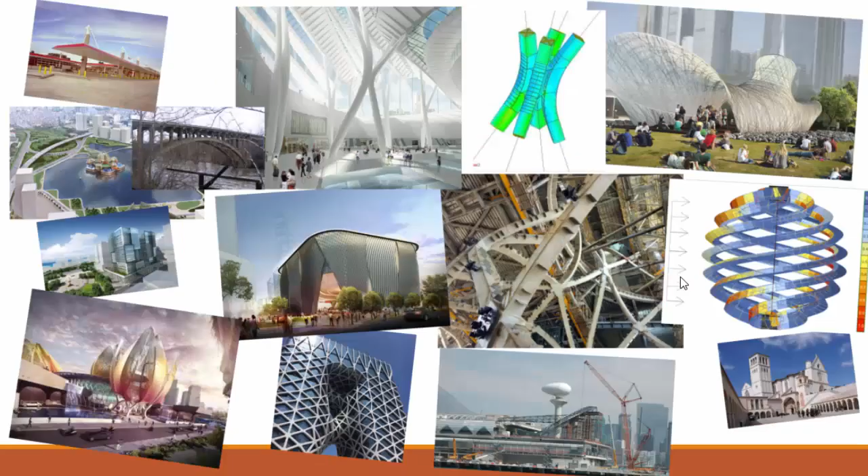You guys already showed me, you guys are doing complex work. You need to be able to speak to the machine just as much as you need to be able to speak to human beings. I'm a firm believer that the only reason I was able to, in this short period of time, work on ridiculously cool stuff like this is because I know how to interact with the machine better than most people in Buro Happold, let alone outside of Buro Happold.

You really need to focus on both. There's not enough in this world anymore to just be awesome at architecture. You need that, that's a given, we expect that. But we need also more people who understand how to interact with the machine. And that doesn't mean going and saying, I know how to use Rhino manually. It just doesn't anymore.

Some of my favorite projects are this one. This was my thesis. This is the Basilica of San Francesco in Assisi, Italy. It's a UNESCO World Heritage Site. In 1997, there was an earthquake that hit the basilica. It had been up for more than 850 years, and this happened. There was some really, really important heritage that was lost, and 4 people died.

Myself and some of the people at MIT, we said, but it's been there for 850 years, why did it actually fall down after 850 years? It's no stranger to things getting hit, this thing getting hit by earthquakes. And it's an absolutely beautiful basilica, by the way, if you have a chance to go.

What we found is in about 1950, there was a beautiful wooden roof, which you can't see in this picture, above all these vaults that collapsed. And they decided, we can't have that anymore, they didn't know what they were doing back in the day, and we're going to replace that with reinforced concrete. So there was definitely a cause and effect that we were able to show: because you destroyed a roof that was 850 years old, which is automatically something you shouldn't be doing in the first place, you actually caused this to happen.

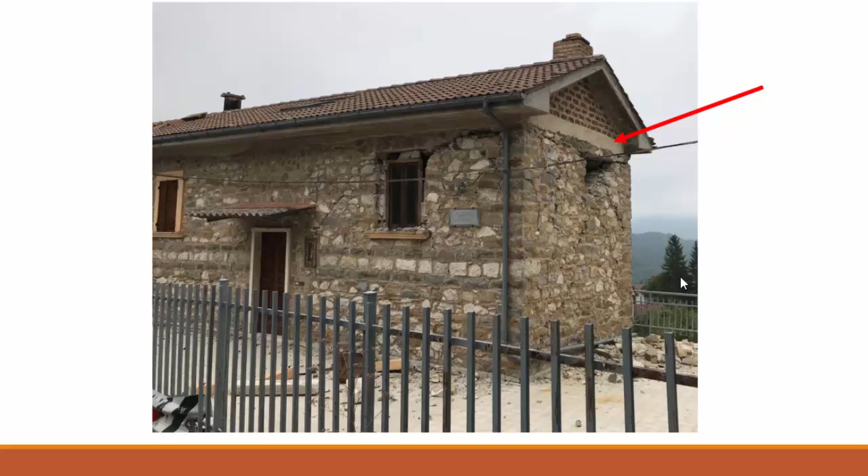That hit particularly home to me. It's really great to be a structural engineer sometimes when this is the house that my grandfather was born in, and the house that I normally would spend my kids' summers in.

When I got the call to say our hometown had been hit by an earthquake, I was already there. I was able to go and tell my family that our house, there was no helping it because right here, they had done the exact same thing to our home. Had we been in here, we probably would have lived, but we probably would have been severely injured.

That's really why, to me, I love being a structural engineer, because you can actually look at stuff like this and understand, nope, do not try and tell me you can fix that without taking the roof out. It's unfortunate, but no one died. And we can actually control how no one will die in the future when the earthquake eventually comes again.

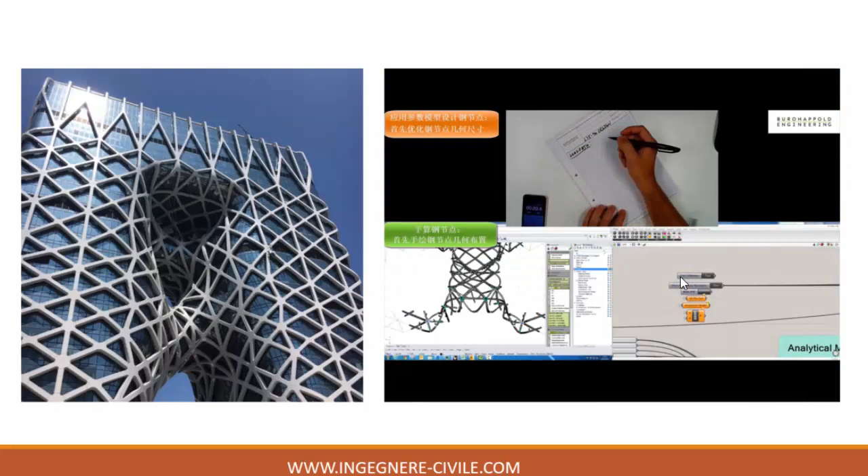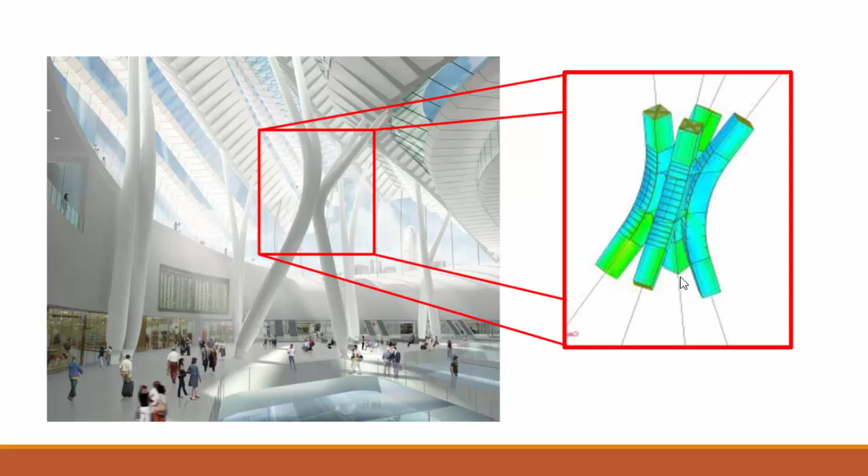My second favorite project ever is Morpheus Tower, which is here on the left. Some of the work that I did on computational engineering we'll talk about tomorrow. Jason's familiar with it because he's seen me do the presentations in Hong Kong. My third favorite is XRL West Kowloon Terminus, which we might talk about tomorrow as well. More really complex work if you're in Hong Kong and have a chance to go see it. It's not the best architecture in the world, but it is impressive from the idea of complexity and how you deliver projects that big in the modern era. We'll talk about that stuff tomorrow.

Okay, like I said, we need to talk the same language, so you have to understand where I'm coming from. There are two golden rules of structural engineering. Rule number one: nothing can ever fall down. Ever, ever, ever, ever, ever. That is unacceptable, ever. Never is a big word, but unless a nuclear bomb goes off, things should not be falling down, okay.

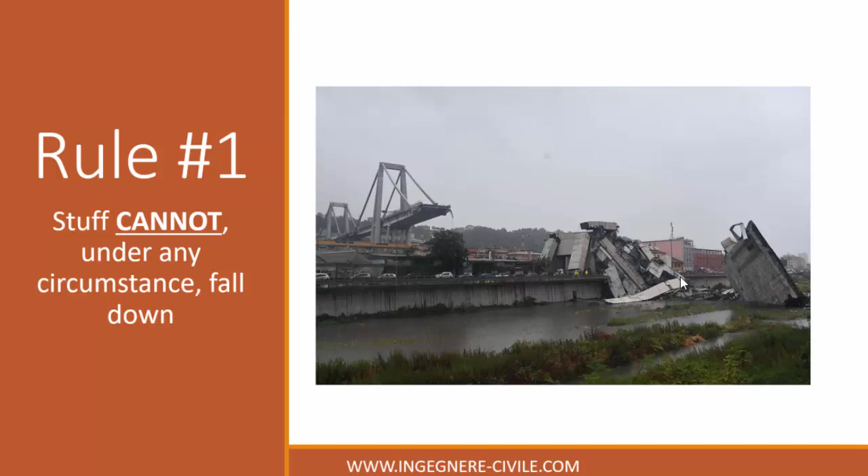Unless the worst typhoon in the world that has never been seen before is a complete anomaly, stuff should not fall down, and even then, it probably shouldn't fall down. So that is why, as a structural engineer, you do lose sleep sometimes, because that is on your shoulders. And it's usually on your shoulders from day one.

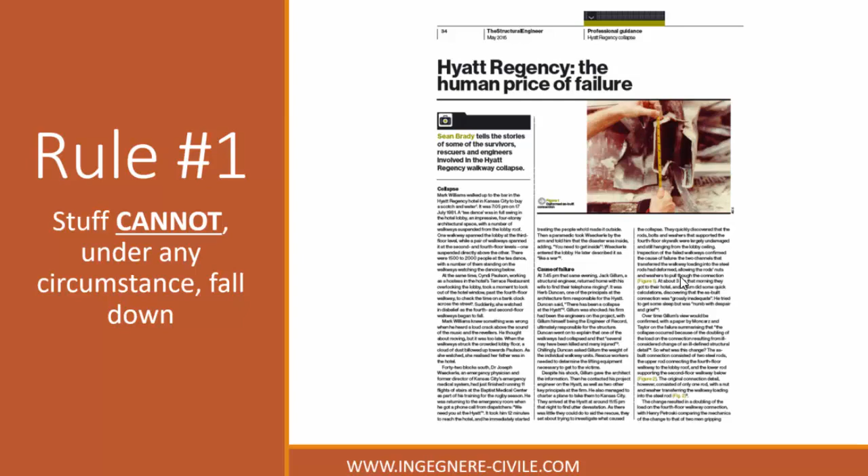You show up from this university setting, and you've been taught about engineering failures. I'm very happy that as part of my training I received this article that is always kind of in the back of my mind when I'm doing stuff. This article, I'm happy to share it, it's something that kind of mixes science and humanity for me. Whenever I think about having to be there if something of mine had problems, I always think of this particular story because that's what we deal with.

I know we're in these nice studios and stuff like that, but we are building things that are very serious. The public safety has to come first.

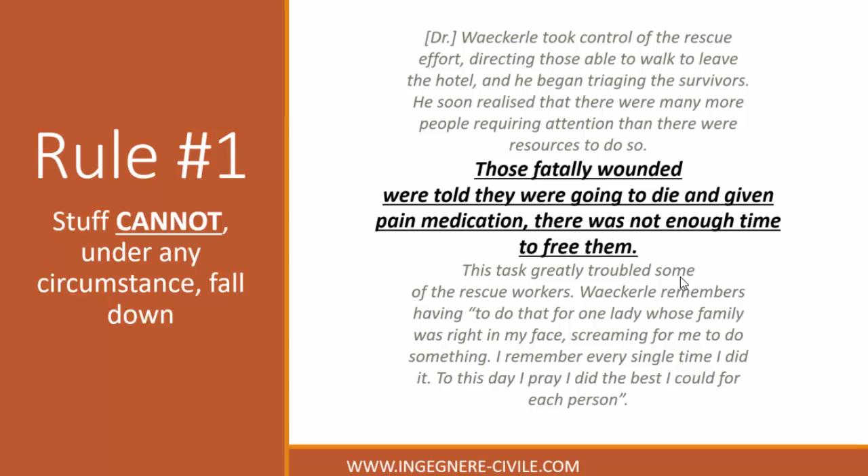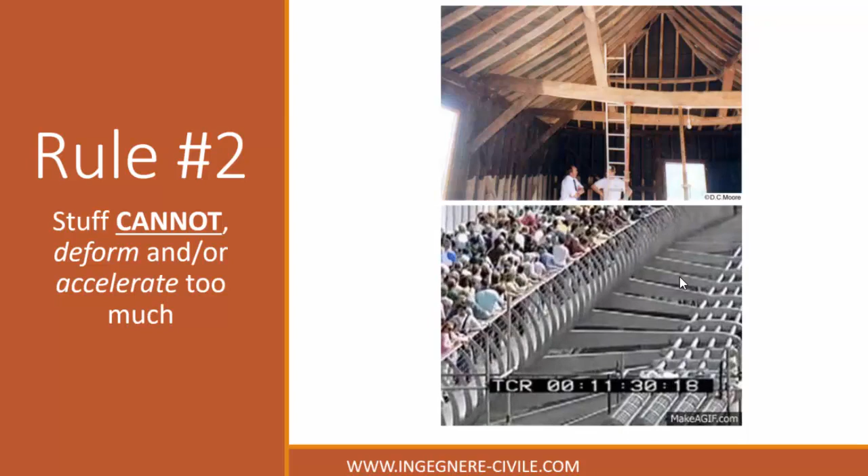Obviously, the big one is the first one. So that brings us to the next thing: what does it mean to make those things not happen? For you to make those things not happen, you have to understand something called capacity.

My favorite question to ask architects, to get them into the right frame of mind for what's coming next, is: if I give you this pen right now and ask you to break it—don't actually break it—can you just mimic how you would break it in the most expedient fashion? This is short for the class. You throw it. No.

So she's doing this. Does everybody else agree? Would anybody else try and do it any other way? We just do that, right? No one's going to try and pull it apart. That doesn't count. No one's going to try and push it. No one's going to try and do this. Right? Okay, good.

Because we all live on planet Earth since the day we were born, we all kind of understand inherently physics and how things break and how things work. But let's be a little bit engineering here - that's only one of the ways of breaking stuff. And that's what we're in the business of in structural engineering - not breaking stuff, but making sure things don't break. You kind of have to know how things break before you can make them not.

So you've picked bending, one degree of freedom. Very smart - we're going to tell you scientifically why that is soon. Tension, compression. No one said, oh, I'm going to torque this, right? Even though you can actually torque this one and break it, quote unquote. Or shearing, which is basically the same thing as what you were doing, except really not giving it any lever arm, right? So that is the fundamental atom of structural engineering.

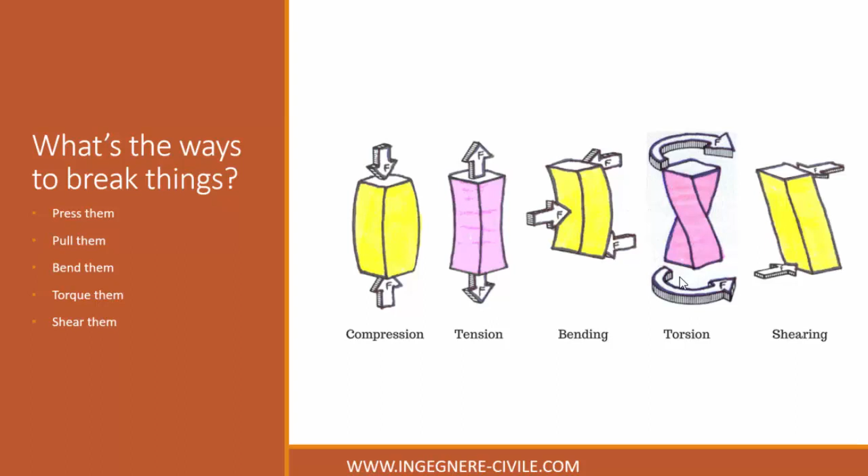These are the ways things break. Now you say, well, that's nice, but we live in things that are not just one pen - we live in things that are like 10, 20 million pens connected to each other. And that's where you get down to load paths.

At HKU, Holger turned me onto this book, Tragsysteme. Very cool book - I really like this book, and I recommend it to you guys, just to get your head around what structural systems are.

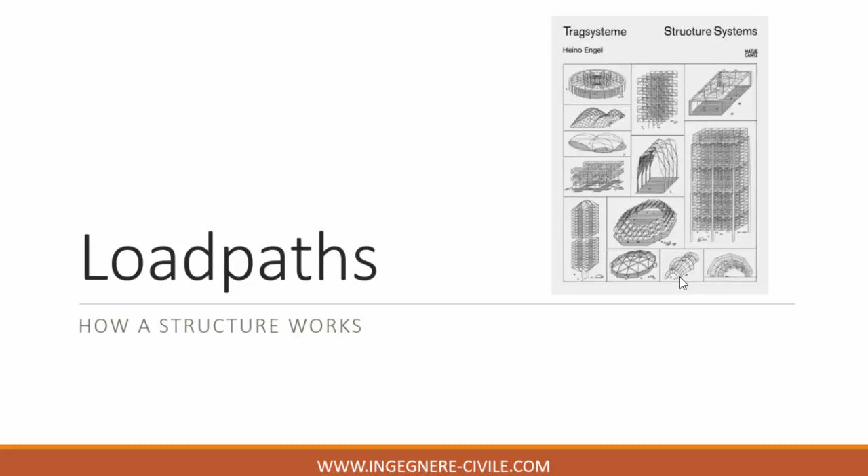But really what it comes down to - and I don't want to scare us with math - there's a bit of stuff we can remember that will help us. Very simple law: force equals something called the spring constant times extension. Everything that is structural abides by this rule. There is a stiffness to the spring, and then there is a deflection. Both of those are related by how much force. It's a very simple equation.

Give you an idea - everything. I just got a little bit shorter, and the chair just got a little bit smaller. By definition, because my skeleton, my joints, everything is a structure - this is a structure. Now it didn't move very much, but by the definition of how things work, it's definitely happened, and I just got shorter. And if you stood up - actually I'm pretty much definitely the heaviest person in the room - if anybody else stood up, they would have proportionally deflected, gotten less short than me, because I'm the heaviest. So that's something to remember: everything abides by this rule.

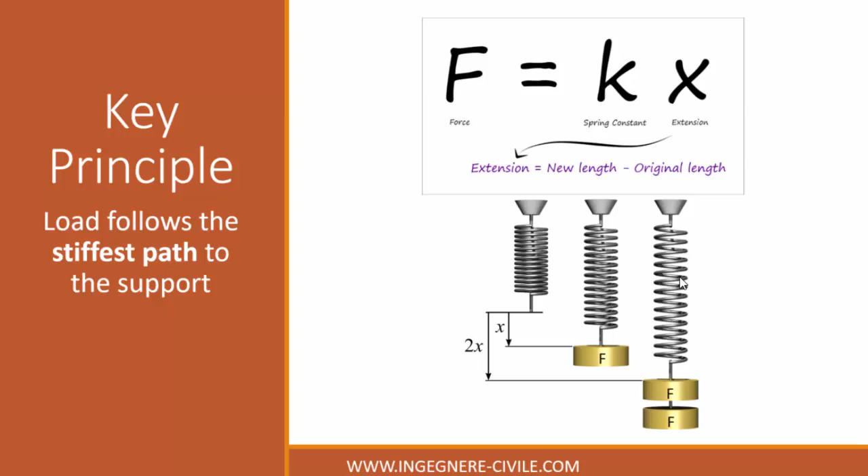That's what this is showing. That spring constant can be kind of hard to wrap your head around though - it's a very engineering term. So let's pretend - the other thing we said is, well, I'm heavier so I deflect more. We're going to assume everybody's bones are the same stiffness, that some of us don't actually have stiffness of slinkies, and some of us have stiffness of these door stops. So the higher your stiffness is, the more you have to pull on something.

And luckily for you guys today, because I am in town and traveling, I brought my gym with me, and I can actually show this. Does anybody know Tom Brady, the American football player? No? He's a big fan of working out, not with weights, but with bands. So I work out with these in the hotel room in the morning. And you might think that looks like a sissy thing, but it's way harder than using weights, and it's way better for you.

So to give you an idea, pass these around. Just remember, because we'll use these a bit - this one is a little bit easier, right? This gets a bit harder, and then this gets even harder, right? So it's all just the same material, but the idea is that by adding thickness and more material to each one of these, we're going from this kind of slinky to something that's a bit more hardcore, all right? We'll just leave these out here - we might do a bit with that to show you guys.

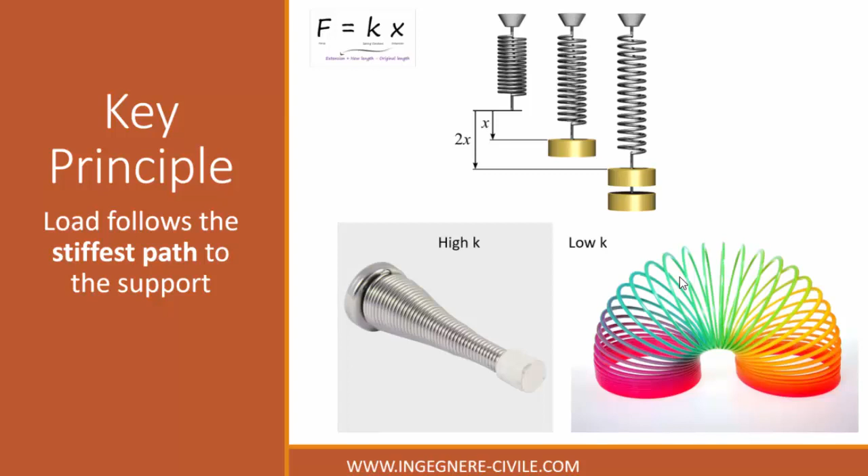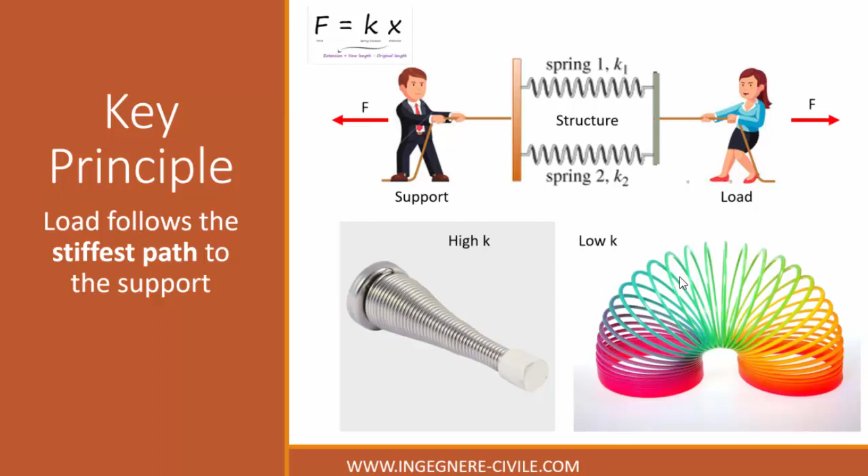Oh yeah. That guy, and that guy, right?

So one of the key things a structural engineer needs to be able to do is understand that, understand that big time. So let's say, for instance, can I have a volunteer, please? It won't be hard. Great.

Hold this one. Get out of the way. Okay, these things can extend twice their length before they snap. All right, so you pull on me. I'm not, you're the one who's going to let go. Look how I'm holding it. Okay, hold it a bit. Yeah, okay, now you take a step back.

Now, which arm is working harder right now? You're really struggling, actually. It's the exact same thing that's going on right here, right? Her hands, just hold them like this so they can see. Her hands are right next to each other, so the deformation of both these things are exactly the same. So right now, you take a step back, you should control the force. Keep them the same. She's having to struggle big time to keep it the same because this one has a maximum resistance of like 60 kilograms, this one is like 5.

So we can do the math, right? If it says 1 meter's worth of deflection gives you 60 kilograms, 1 meter's worth of deflection gives you 5, and she stepped back 10 millimeters or something. By that equation, we can actually figure out what goes where. And obviously it's very much something that this guy goes, no, I can handle it, I'm going to take that for you.

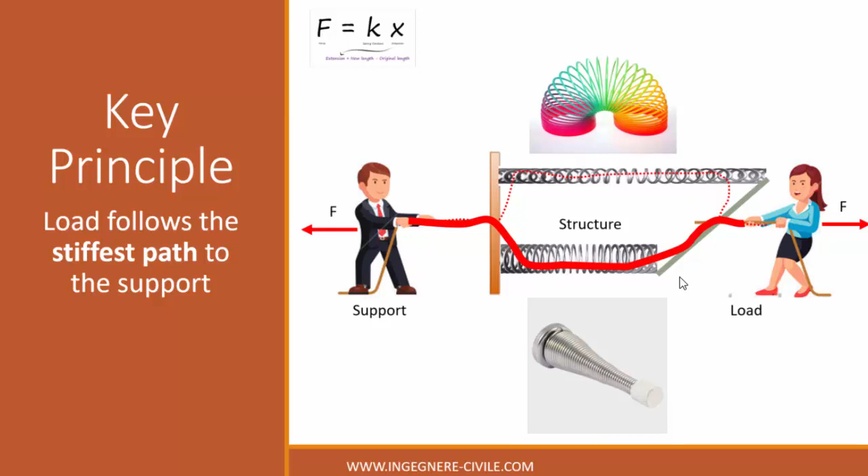That's huge, right? Because, going back to what we talked about before, it's not just that we have tension and compression, because what we just did was tension. These guys are pretty bad at compression, right? We could play that game all day in compression, it's not going to matter. But a lot of times we deal with bending in what we do, and you have a horizontal structure that's only supporting 4 points—it's a bending problem more than anything else.

And that, to do that with these guys, you kind of have to double it up, right? But that shows you again—now can you imagine trying to play with this, and I tell you to try and make this extend? That's why we break the pen by bending, because look at that. I can deform it like crazy in this direction, but in this direction, I don't care if we all work together, that's not going anywhere.

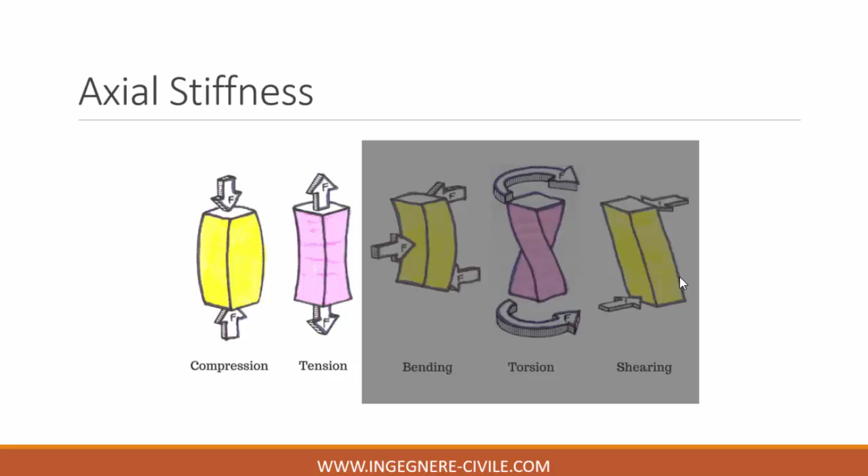So it's opposed to, I think some bad engineers would walk in here and try and tell you all about that. With the Engineering 101, this is what we get in our second year. And I know that looks scary, but it's nothing different than what we've talked about.

We can kind of see, if I put the arrows on here, P is right there, deflection is right there. So everything else must be the stiffness, right? That's all there is. So in this situation, we're saying the function of stiffness, the relationship between how much we have to pull and how much deflection we get, is the area times some fancy constant, which you don't have to know about, versus the length. And this is the big thing.

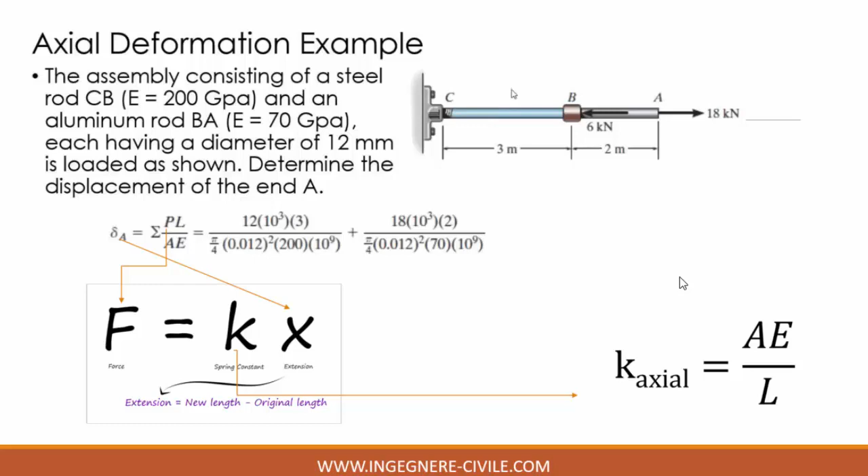This is where it comes into you guys, because you guys control this. You guys want to control this, but to be honest with you, we control this because we don't control E. We can, but really in structural engineering, as much as we want to act like we're geniuses, we only have two materials that we really use, concrete and steel. So we're not like geniuses when it comes to actually playing with the variables that we have. So I want to stress this to you guys because the L is really in your guys' court. And I want to try and get you guys the scale of when you play with the L, what it does for different, what's called degrees of freedom.

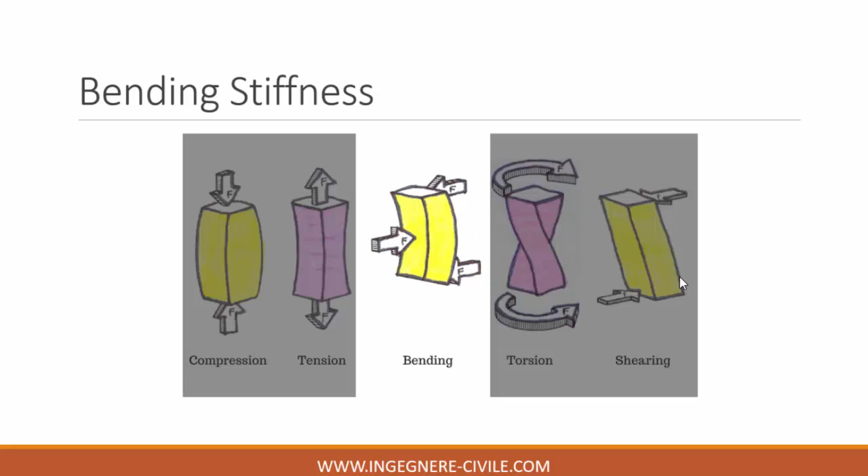Because what I just showed you is for the situations of compression and tension. Let's stick with tension, because compression's a bit more difficult since things can buckle in compression, but they can't in tension. But bending is where we see a lot of stuff. We're standing on floors that bend, right? The table is bending because we have stuff on top of it.

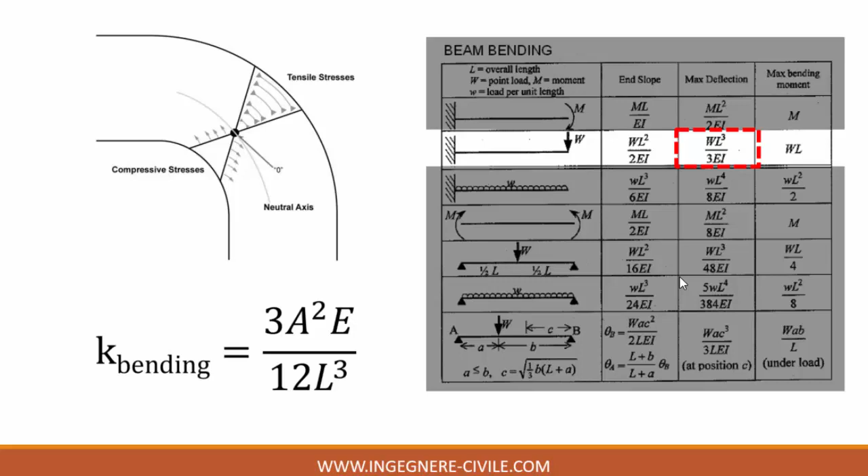Engineers have all these tables that give us the exact same equations that I just showed you, relating the force that you put on something to the deflection that you get. And what is that ratio? It's the stiffness. So the stiffness for bending involves a bit different, a bit more involved, equations. Let's put them up next to each other.

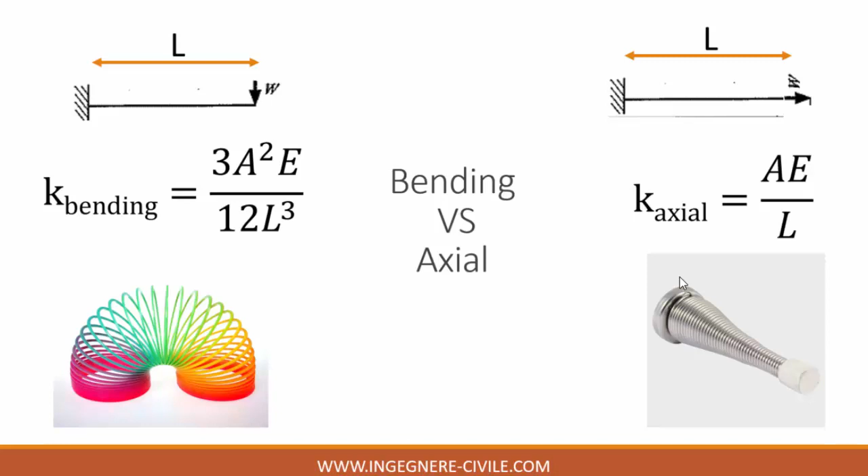Anybody notice any difference? What's the big difference that you guys control mostly? L, right? That L is now cubed. So I'll spare you the details of the math and how we get to this direct comparison, but effectively, if you do the math, what you'll see is that this stiffness right here is a lot less stiff.

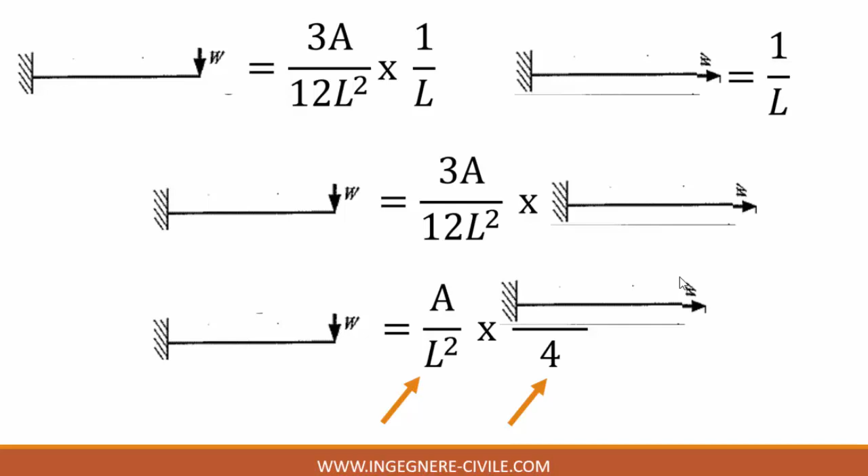So if we say something that bends is actually a fraction of something that's driven, what does that actually come out to be? It's already a quarter less stiff. Plus you have this L squared. Let's throw out the quarter and focus on L squared.

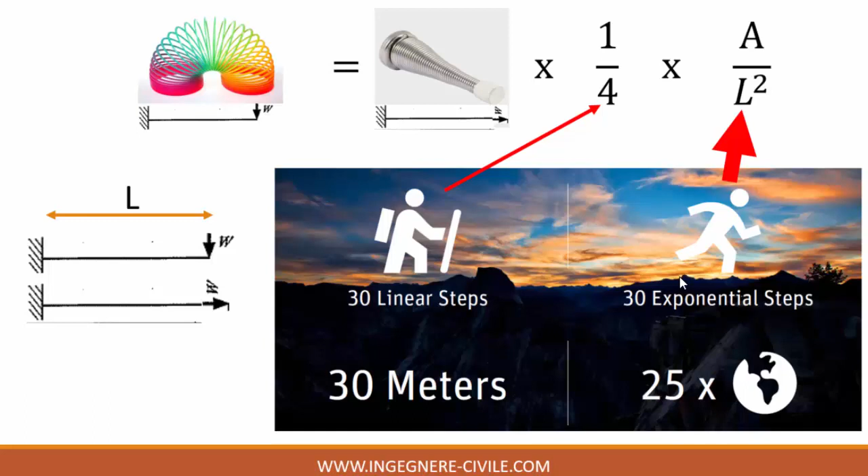We have to think exponentially now. And when you look at something that's exponential, this is why structural engineers cannot sometimes get ideas across to architects, because we don't speak the same language. You doubled the length, you didn't just double the problem, you made it four times as bad. It's exponential. This is the typical statement: if you took 30 steps, you'd end up on the other side of the room, but if you took 30 exponential steps, you'd end up at Mercury, almost at the surface of the sun.

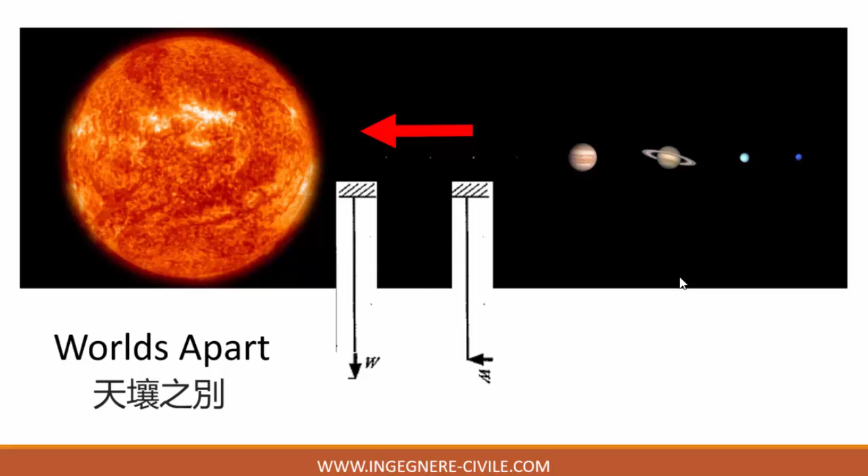So as you guys are talking to me and we're looking at it, and you're talking about the precedent, yeah, but we are twice as long, so that's already four times as bad. We have more load, so that's adding, and it's adding exponentially. Doesn't mean we can't fix it, it's just the idea that when we get to that point, we say, well, it's actually going to be a meter-wide tubes. That's where it comes from, because we get there quite rapidly in a nonlinear system.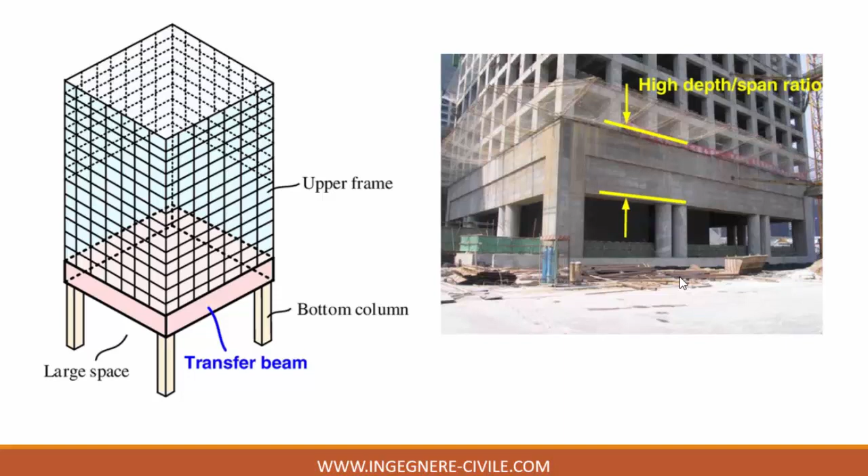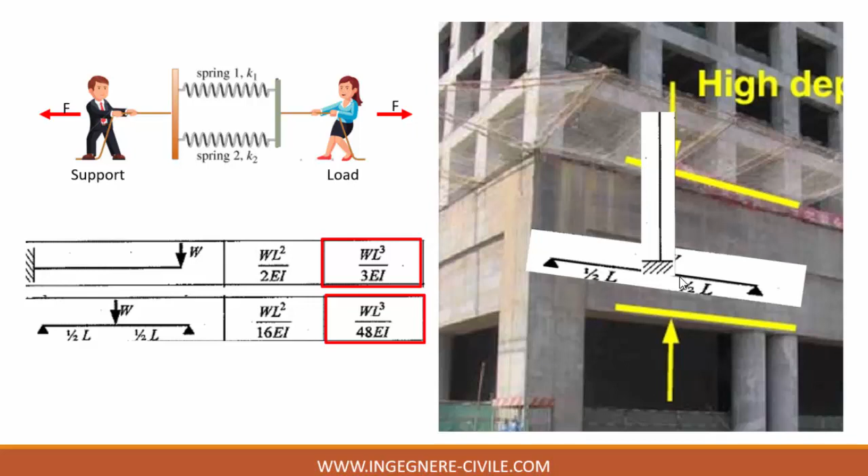If you guys have ever seen transfer structures up close, have you ever wondered why all of a sudden something that's that width ends up being this width? It's that problem. It goes back to, we've had something that was in compression, something that's in bending, and the second that you have that, you start to accumulate material.

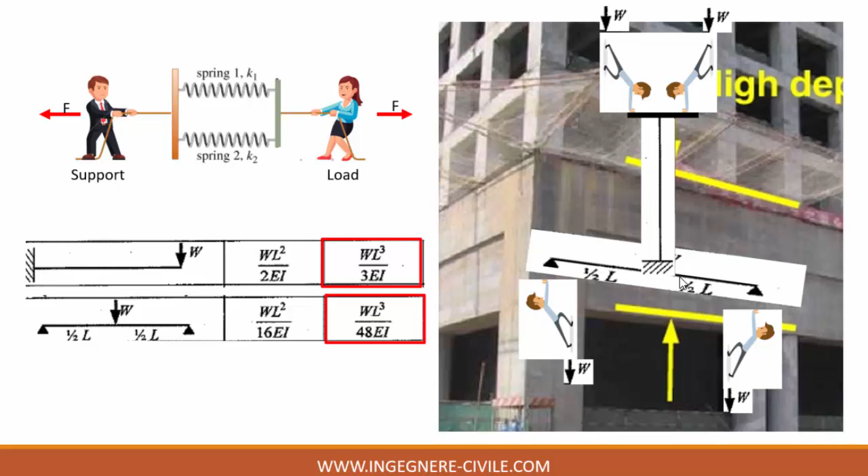So this is why a lot of times you'll hear engineers saying, let's get a better structural system that has less onerous spans. Let's try and make this structure, for instance, something that's a complete arching structure, something that doesn't have to actually bend, but rather is completely in compression.

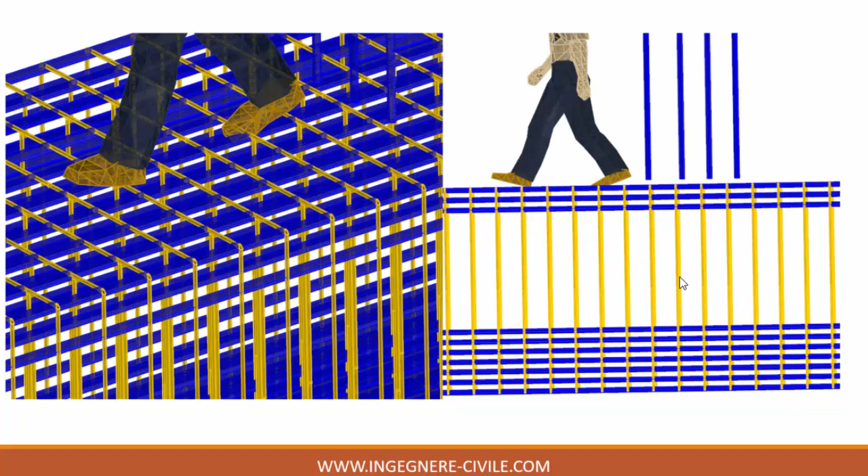Just to show you the scale of things, again, on one of my projects, this was a transfer structure that I designed, and you could see the level of involvement. Just to give you an idea, if you ever see that in reinforced concrete, those are the reinforcement bars—it's never right, there's no way that is correct, but there's different project constraints you always have to deal with. These are bars that are this thick, and there's 7 layers here and 3 layers here, all coming from the columns that are not even close to the same. So that's the effect.

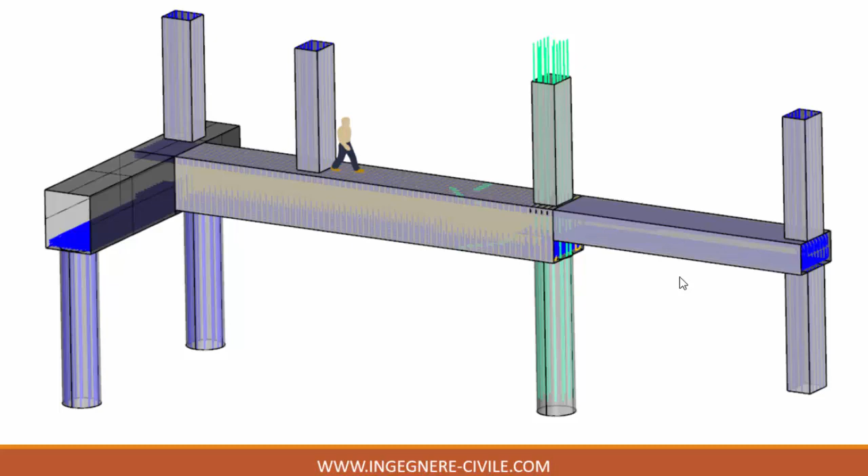I think that's why I wanted to get that out there right away, to explain to you guys the rules of structural engineering, and why, when we go through this, what's going through my head is in terms of, can we get onto that good side of exponential and not be suffering from the bad side of exponential? So that's really all I got for you guys. I have more stuff for tomorrow, but for now, that's the intro, Structural Engineering 101, so we can communicate. Thank you.